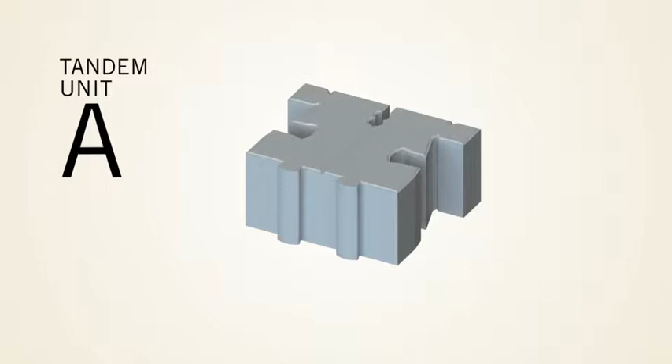The structural units come in 4 different sizes. With each structural unit, there is a veneer unit of the same length. The unit can be assembled using a dovetail joint, an interlocking male-female system.

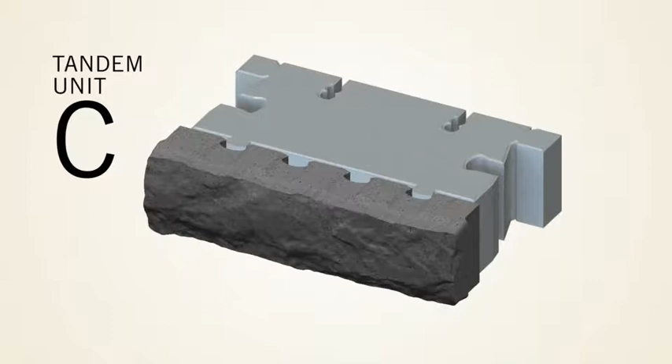Each structural unit has 2 vertical tenons, male side, on its facade, and each veneer unit has at least 2 mortises, female side, at its rear. The veneer units are joined to the structural units by simply sliding the mortises into the tenons to create the tandem unit with a total depth of 222 millimeters, or 8 3/4 inches.

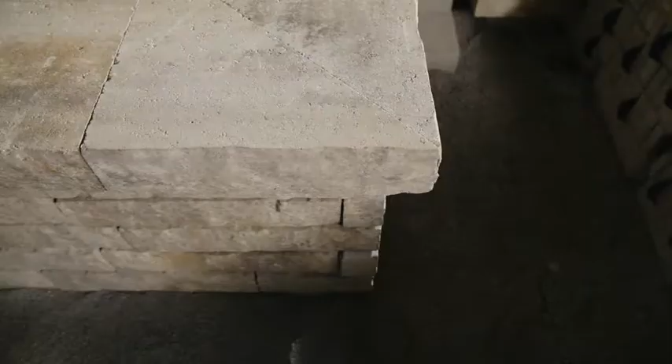Allowable heights: 650 millimeters, or 26 inches without a slope. 1,050 millimeters, or 42 inches, with a slope of 9 degrees.

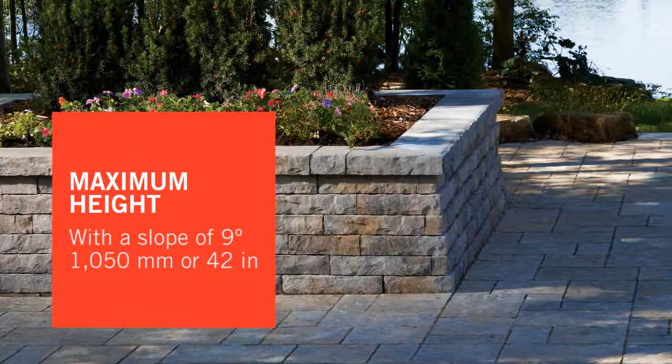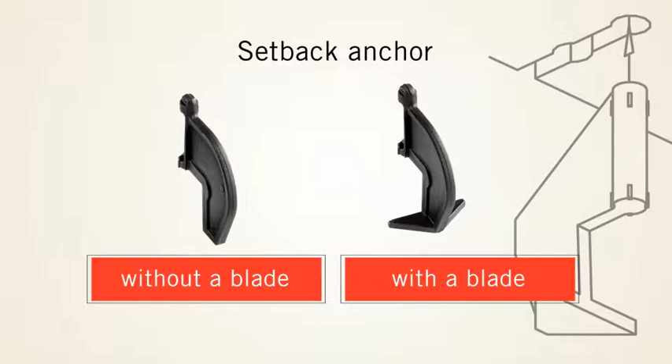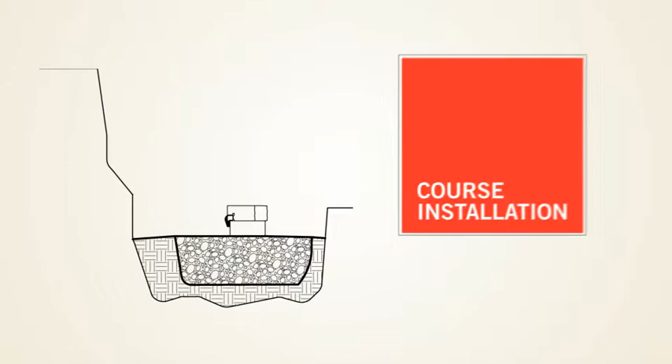The way in which the setback anchor is positioned in the Lafitt Tandem Wall system determines the slope of the wall. This positioning is what allows for either vertical or sloped walls. Up to 900 millimeters, or 36 inches high, the Lafitt Tandem retaining wall system uses the same technique for excavation and preparing the foundation as the Celtik wall system.

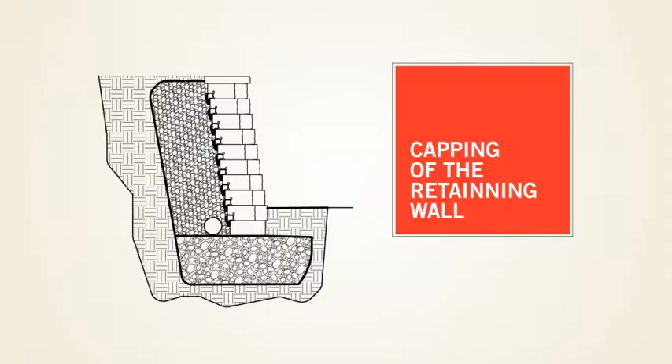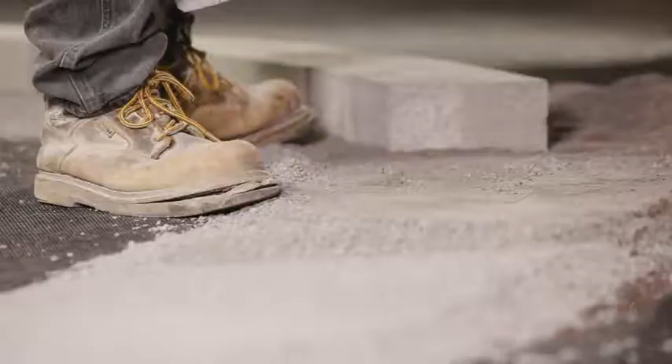The courses are built in the same way as the Celtik wall. The first row of the Lafitt Tandem Wall is built using the starter unit. This unit is to be installed directly on the granular base foundation and leveled. The use of starter units is strongly recommended, given that the tandem units can be placed on a uniform base, ensuring overall wall stability.

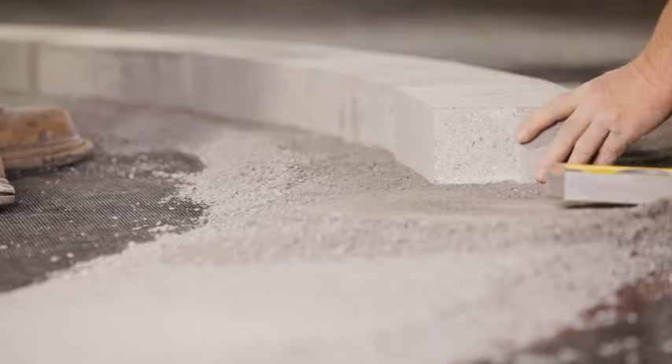The pre-assembly of veneer and structural units is highly recommended before beginning to install them during wall construction. Once pre-assembled, the tandem units can be installed on the starter units randomly using the 4 different sizes.

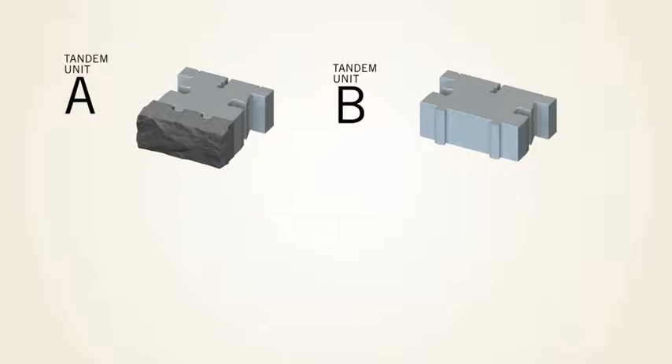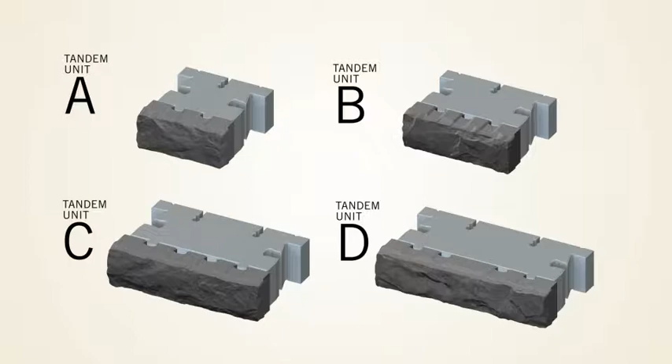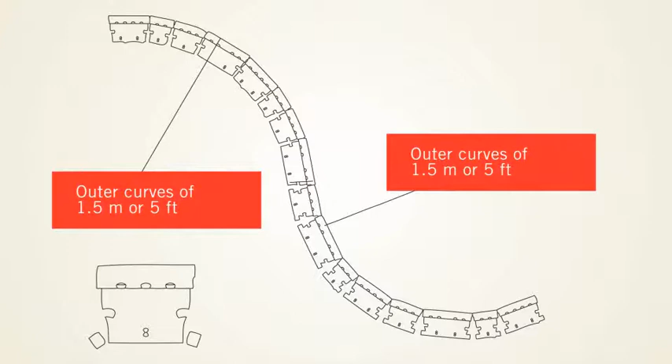By using tandem units A, B, and C as shown, the following minimum curves are possible: 1.5 meters, or 5 feet radius for outer curves; 1.2 meters, or 4 foot radius for inner curves. It is important to note that the radius of the curve may vary depending on the choice of units and their installation. The 3 smallest tandem units, A, B, and C, are recommended for use when building a curved wall. Take into consideration that there will be a surplus of D tandem units for the remainder of the wall.

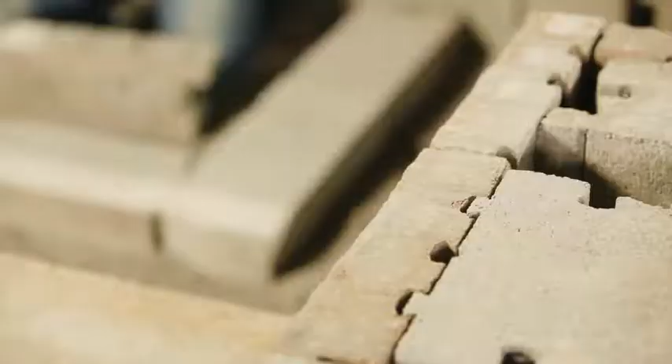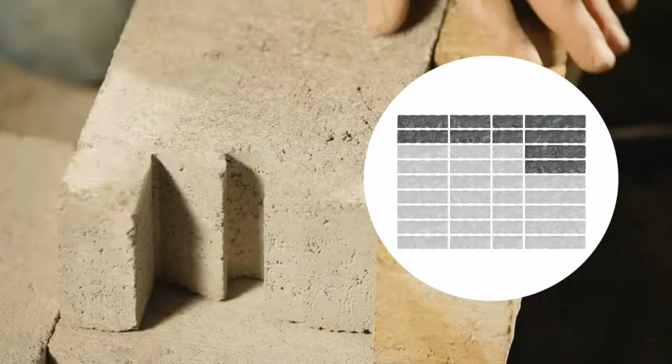Retaining wall construction should begin with a corner to avoid breaks and aligning the vertical joints. Each layer on a cube contains 10 veneer units with a textured end. Veneer units B, C, or D must be used to make the corner. An outer corner is created using veneer units with a textured end out. These units are reversible to form both left and right corners.

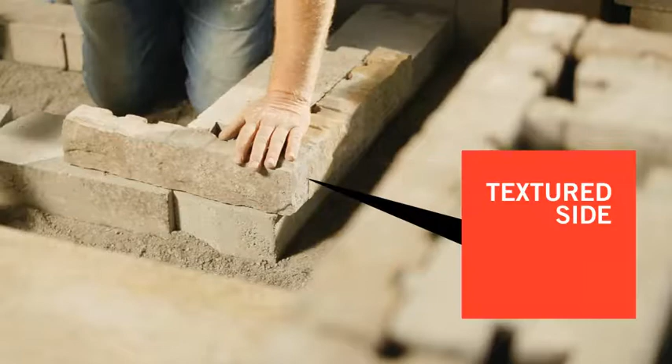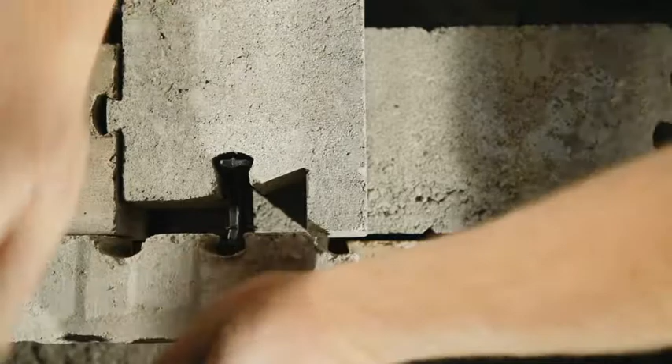For each course, the facing that forms the corner is affixed to the structural unit using corner connectors designed specifically for this purpose. It is simply a question of alternating the placement of units from one course to the next. We recommend to glue the elements used in the corners of each row using Permacon concrete adhesive. There are 4 ways to build an outer corner.

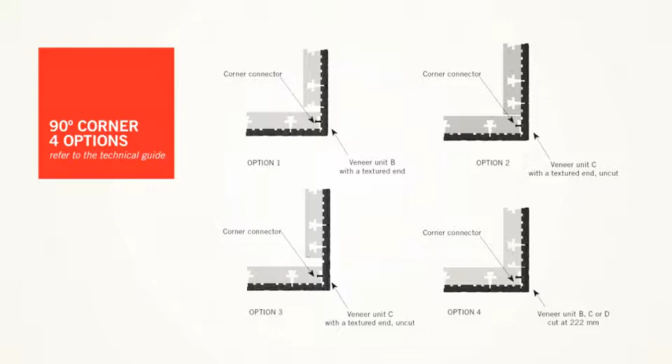Building inner corners is done by applying the principle illustrated below. For a more solid result, we suggest the use of tandem units C and D. When building inner corners, it is best to use tandem units C and D. However, other units can also be used.

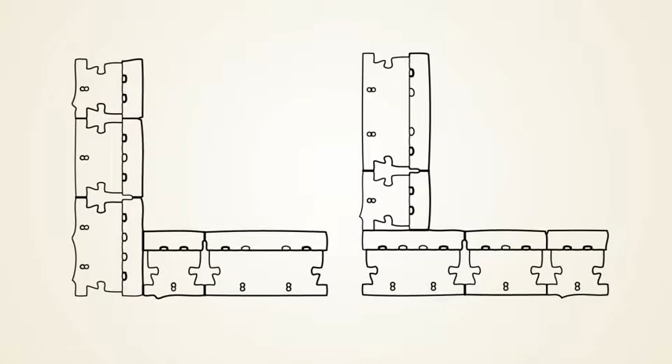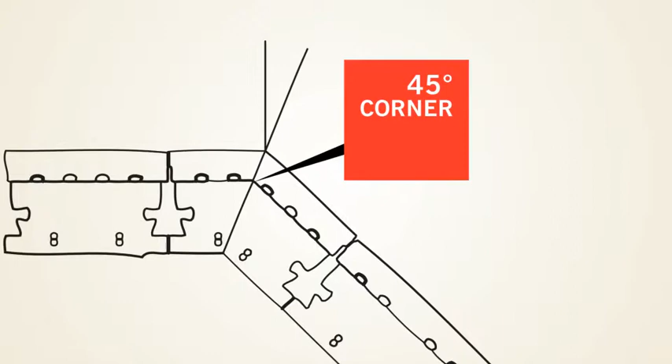It is also possible to build corners on a 45-degree angle. Simply cut each tandem unit used to make the corner on a 22.5-degree angle. These tandem units must be glued together using Permacon concrete adhesive on the horizontal and vertical sides.

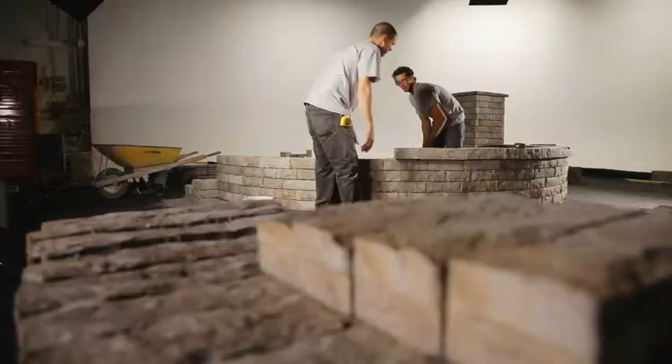The Lafitt Tandem Wall finish is completed using straight capping units. Straight and beveled capping units from the Celtic wall system and Hemmingford 70 capping units can also be used to accentuate the wall's finish, different textures and colors. Straight capping modules for curved retaining walls must be cut on site to accurately reproduce the final shape of the wall. It is also possible to use Celtic or Hemmingford beveled capping units.

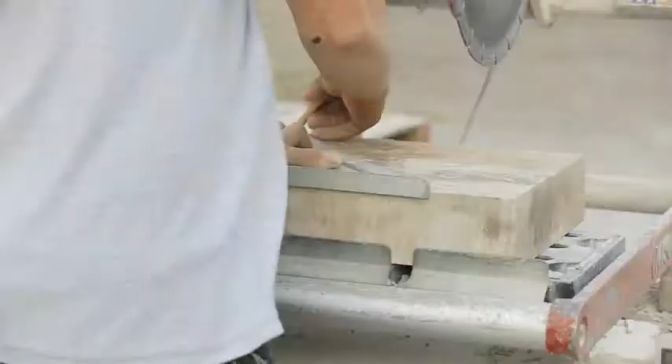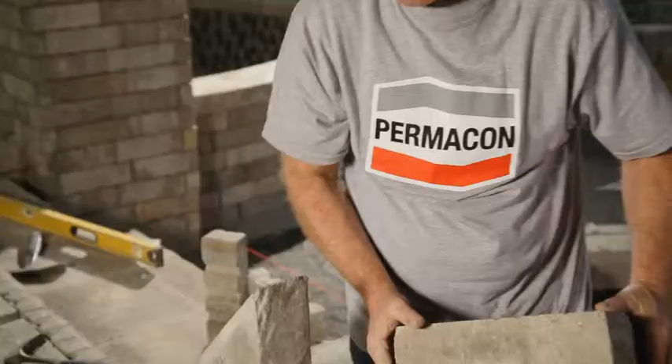To cap a wall with a 90-degree corner, capping units must be cut at a 45-degree angle. As when building a Celtic wall, the capping units are secured to the top course of tandem units using Permacon concrete adhesive.